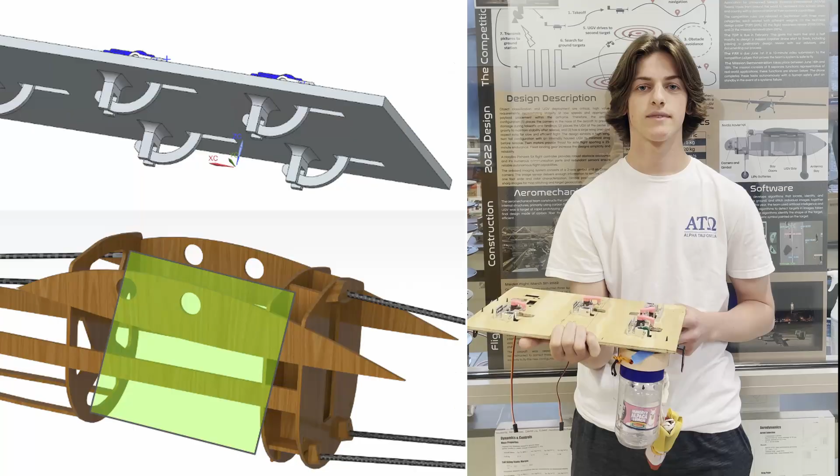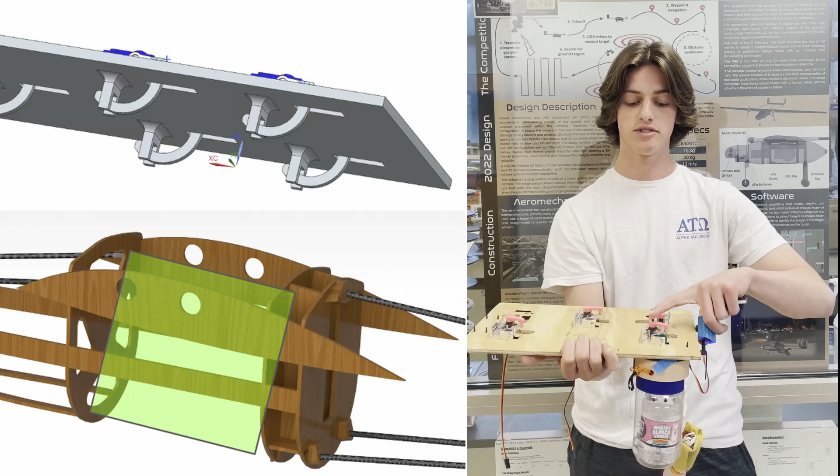So to release our payload from the drone, we have this dropping mechanism right here. And the way that it works, we purposely designed it so the payload would hang perpendicular to the dropping mechanism. This prevents any off-axis torque on the actual servo itself, and it also makes it a passive system instead of an active system where the servo would constantly have to be on to keep the payload up. We also chose to go with a small servo and adaptive arm instead of a larger servo to save weight in the drone. This dropping mechanism connects this servo to the flight controller with these wires right here.

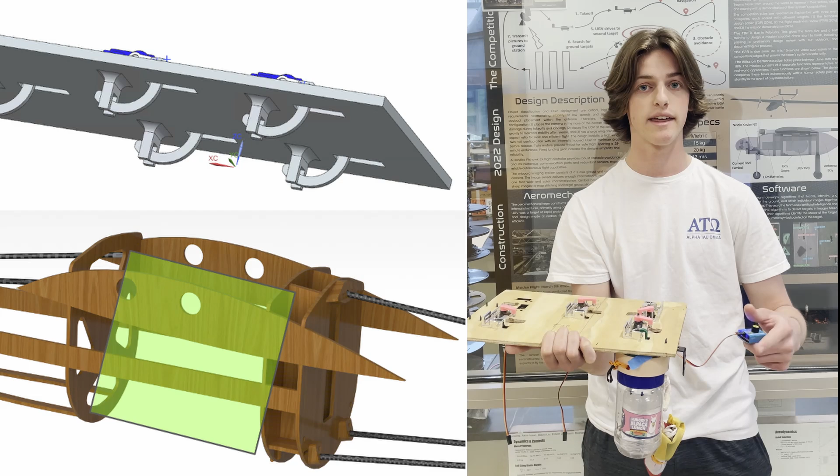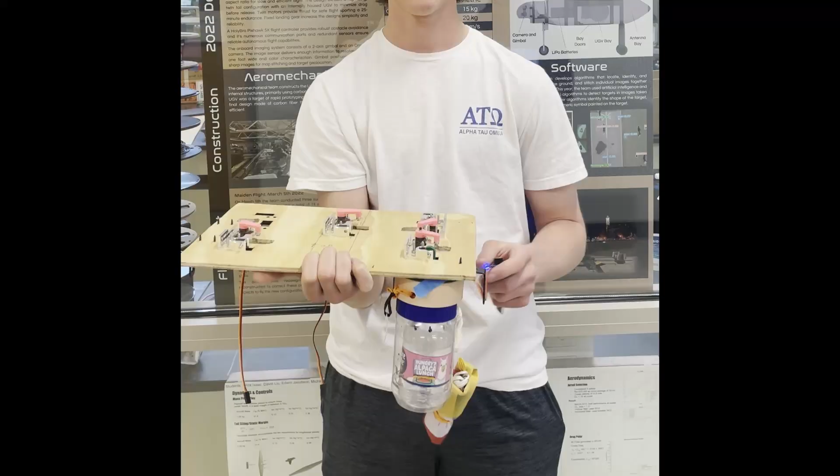And GNC actually has a when-to-drop algorithm, which is a Monte Carlo algorithm that decides the most optimal time of when to drop the payload to ensure and maximize the chance that it lands and remains within the 20-foot radius circle. And they also know when to drop which bottle because each bottle has a specific shape or color associated with it that has to land within that circle. If you want to come over here, we can show a test demonstration.

In my hands is this year's payload. As you can see, it's divided up into two sections, one being the electronic housing at the top, the other is the peanut butter jar, which holds our water bottle. As this is blow molded, we attach our parachute into this portion to make sure it would stay sturdy and wouldn't come out, as we will be losing points if the payload separates into multiple components.

So getting into the electronics chamber, as you can see, I am holding down a limit switch, and that limit switch, when pressed, will go inside of our entire drone. When unpressed, it'll actually start a timer, which will release this mechanism you see over here. Currently, it has 0 seconds on it for testing purposes, but for our final version, it will be around 2 seconds depending on the drop. As you can see right here, once I release it, the entire parachute falls through.

The way this works is that a servo actuates a small paper clip and bars over this little section over here. From the opposite end, a rubber band comes about this point and latches on to said paperclip. The payload, or rather the parachute, is wrapped around by the tensile force of that rubber band.

Getting into the nitty-gritty stuff of the electronics, as you can see over here, the entire electronic chamber is hollow and is powered via a battery and an Arduino Nano. The limit switch is mounted inside of the cap and it is bolted on currently to ensure we can replace stuff if we need to. And finally, this wire over here controls the servo and is routed from the inside of the entire cap.

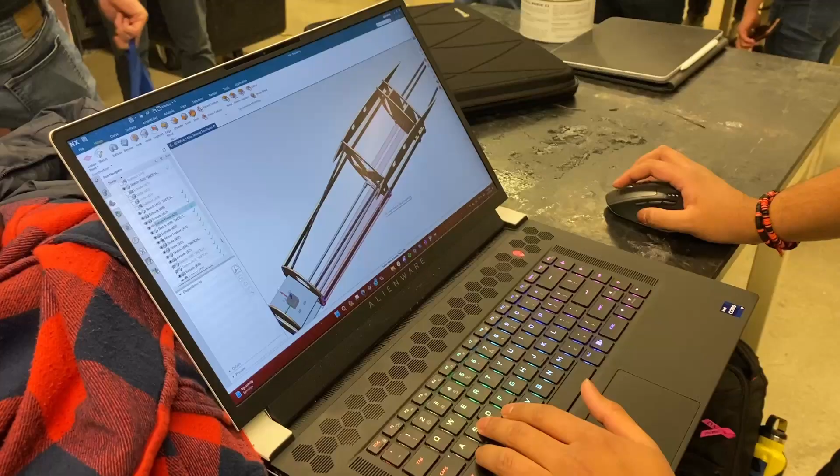So for center of mass for the aircraft, we focused around making sure that, of course, center of mass is ahead of the neutral point for stability, but also we were looking at where we can have our moment coefficient equal 0, or where our trim condition was, to have the most efficient possible flight. Because of course, if we have to trim the aircraft for steady level flight, that means that that's going to incur extra drag and extra effort on the part of the pilot.

To that end, we adjusted the center of mass until the plane leveled out at around 5 degrees angle of attack, which was right in between our cruise and loiter conditions. And we also made sure to place it within the payload bay so that as mechanisms designed their system, if the payloads were dropped in flight, the center of mass wouldn't dramatically change, meaning that the flight characteristics of the plane would stay approximately constant at all times.

So our composites last year were a twill weave. It was 2 layers of twill for all of our aerodynamic surfaces. This year we changed to a plain weave due to sourcing problems, but we went with just 2 layers of plain weave, and then our wing internal structures were made out of, instead of plywood like we had in previous years, a sandwich of balsa and a layer of plain weave on either

side. With our fuselage, last year we had 2 layers of twill weave with a core material of Soric acting as a spacer, and then another layer of twill. This year we chose to switch out that Soric, which ended up absorbing a lot of resin and adding a lot of weight to our fuselage skins, and we added in a layer of unidirectional weave to take the longitudinal stresses that the fuse would handle, and then we sealed both sides with some more uni to distribute those forces and make sure to get a clean seam.